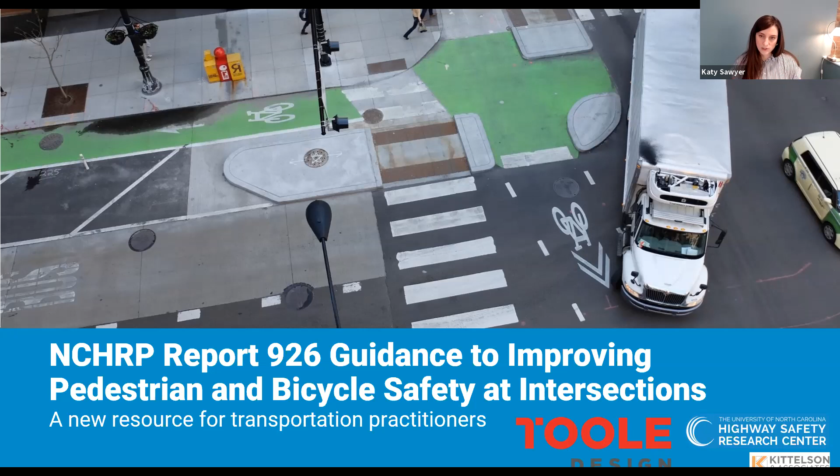This particular guide was led by University of North Carolina's Highway Safety Research Center with additional research support by Toole Design and Kittelson and Associates. So I'm going to walk you through this guide. I think it's a really great guide for practitioners. A lot of us have had questions over the years of suitable countermeasures and how effective they are with things like Vision Zero and Toward Zero and safe system approaches that are becoming very popular. I think all practitioners could use some more help on determining what are the most effective countermeasures for increasing pedestrian and bicycle safety at intersections.

So what that translates to today is that about 18% of fatalities on our roads are happening to bikes and pedestrians, even though they only make up about 4% of the total trips on our system. And so that's a huge injustice when you think about our most vulnerable users and also the amount of funding that we're putting towards transportation safety projects. Even though they're making up about 18% of those fatalities, typically only 4 to 5% of federal funding is going specifically to bike and pedestrian safety.

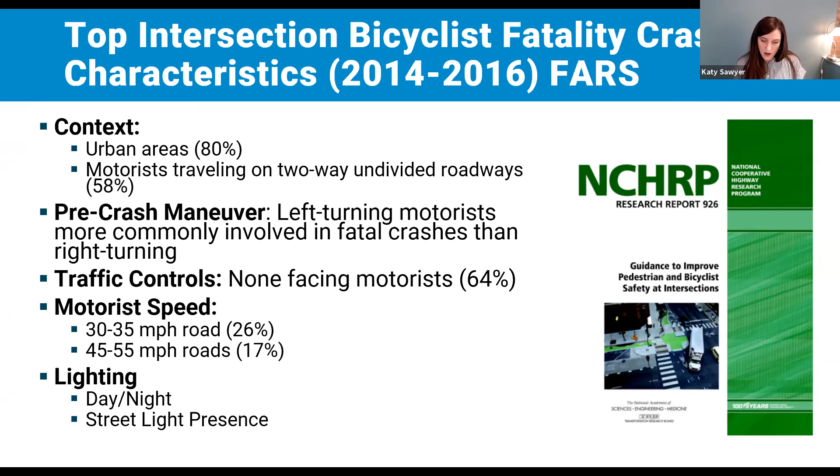So some of the other references and guidelines that this report references that exist today: FHWA PedSafe and BikeSafe web resources. There is the AASHTO bike guidelines. ITE has some context-sensitive design manual around multimodal systems. And then the FHWA STEPS program recently came out with pedestrian safety at uncontrolled crossing locations. So these are all really great resources that this guide references. However, there's some holes in some of these.

I think a lot of practitioners know a lot of the countermeasures that are out there because they're kind of thrown at us. So we know of a ton of different things we can do, but we're not really told the process for selecting the proper countermeasure and the research behind it. So using this guide, the guide is set up so each chapter is a different step in the selection process. So it creates a framework for improving bike and ped safety at intersections.

So the first step is framing the decision-making process. As this FHWA quote states, this is from some educational material, bicyclists and pedestrians are intended users of the roadway. 10 years ago, you might have been able to say, well, this street wasn't really meant for pedestrians, so that pedestrian shouldn't have been there. You might have been able to get away with that in the past, but things are changing, and liability is changing. So by not addressing these sorts of crashes, local jurisdictions are really putting themselves at a huge amount of risk for liability.

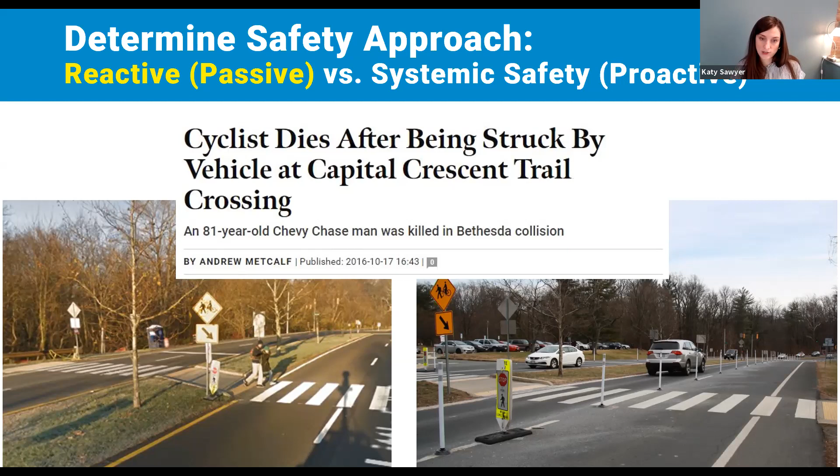So chapter 2, identify and collect data for analysis. As an engineer, my first question is always, what's the ADT on a street? What's the posted speed limit? And what's the actual speed? So that's all motorist data. It does help me to make some contextual decisions about what's happening on the street.

It's also the most readily available data, but that's not enough data to really help inform decisions for mitigating safety issues. So this guide really dives into other types of data that can be useful. For example, crash data, obviously. It talks a lot about exposure. So the ADT of motor vehicles helps you decide on the amount of exposure that bikes and peds are experiencing. Things like turn volumes also help with that.

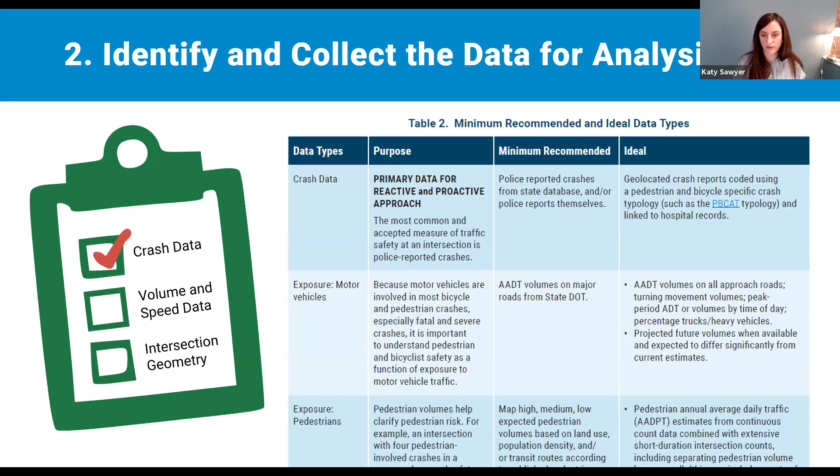So the infrastructure geometric design is very important. So it tells you how to look for certain issues there. Signal operations, intersection control, of course, speed, and then those conflicts that are happening. So this guide really dives deep into collecting data. Data is so important. We talk about defensible data-driven decisions, but I don't know if we talk enough about the quality of data, tying data to the purpose of our safety project, and then afterwards evaluating that to make sure that we've accomplished our goals.

So one thing that this guide also does that I really like is that it dives into the top pedestrian and bike fatality types, and it walks you through what is happening for each of those types. So for example, bicyclists riding through a signalized intersection on a red light, that's about 15% of fatalities. That's really high. I think a lot of people may say, well, of course, bicyclists aren't following the law. They never do. They're just running through the intersection.

But as an avid cyclist, and knowing human nature, you don't have to be a cyclist to know this, but people on bikes aren't just blindly blowing through intersections with their eyes closed, hoping that traffic isn't coming. There's more happening here. I know that cycle lengths are timed for motor vehicles, typically, and bicyclists and pedestrians don't like to wait more than 30 or 60 seconds before they try to find an opening in traffic to go. So retiming those signals is important.

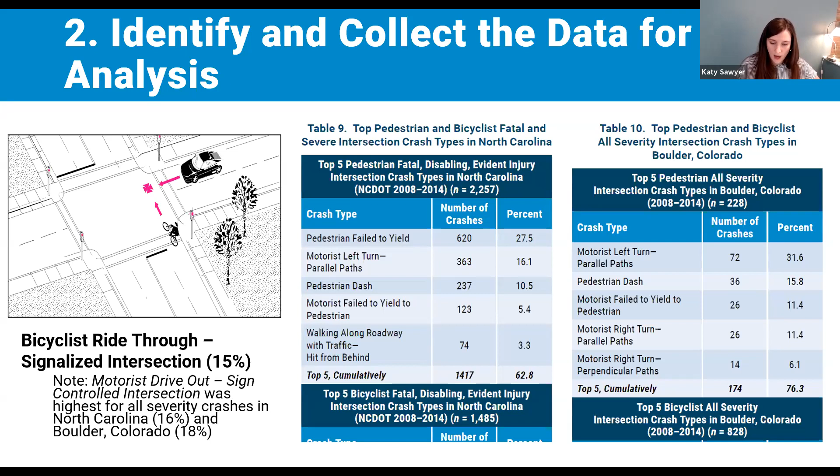Also looking back at that crash data, that is really not as useful as it should be. You may know that a crash happened at an intersection, but you don't know if there weren't bike facilities there. You don't know where that bike was. If there was a bike lane, they might have been in the bike lane. If there's no bike lane, they could have been traveling on the sidewalk. They could have been trying to use the crosswalk to cross with a pedestrian signal. There's a lot of things that could be going on. So this guide kind of helps frame some of those.

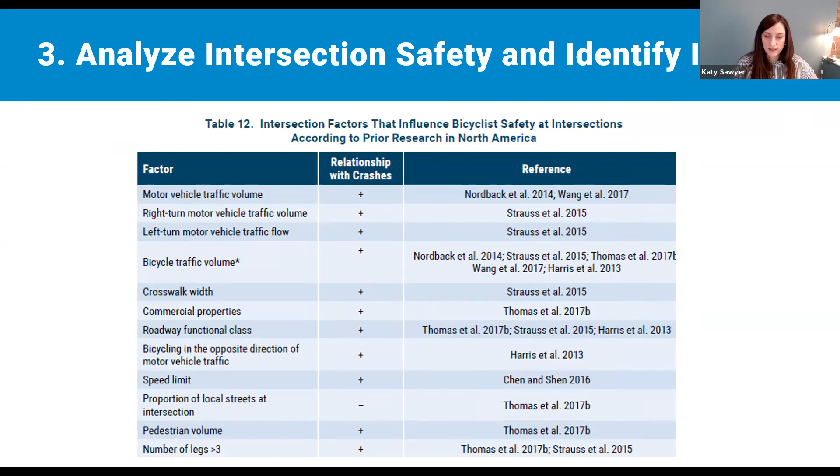And then chapter 3, analyze intersection safety and identify issues. So there is no systemic guide yet for bike and pedestrian safety, kind of thinking of that proactive approach, but past research can still be used to identify risk factors that have been found to impact safety. So the guide has some information on that, which can be helpful, kind of positive and negative correlation to safety. And so this is also kind of looking at that proactive approach.

So if a car opens their door and they get doored, they're flying into a bus, right? If a driver is distracted for a split second and starts to veer into the bike lane, they're getting hit. So really thinking proactively about our streets and how we can make them more safe before a tragedy occurs is really important.

So one way that this guide helps to address some of those issues is that it starts to think about contextual countermeasures, and it incorporates that factor of safety that allows for all roadway users to make mistakes. We're all human, we're never perfect. So that context for this guide is done by creating 3 different tiers of mitigation. The first tier is something that supports motorist yielding. Number 2 requires intervention to induce the motorist yielding. And tier 3 completely separates the modes or requires motorists to stop.

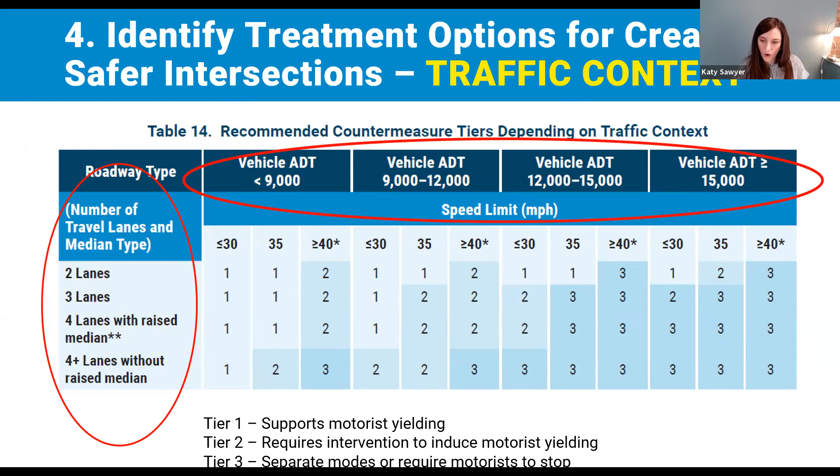And so when you look at this chart, you've got the ADT up top, and then you've got the number of travel lanes. So when you look at 4 lanes with raised median and ADT greater than 15,000, this chart is saying that you're at a level 3. You need to separate your modes or require motorists to stop. So for the intersection that we were looking at previously, this guide is telling us that it's a tier 3. And if you want a high level of effectiveness for reducing the likelihood of crashes at this intersection, you're going to have to get pretty severe: grade separated crossing. So build a bridge or dig a tunnel, channelizing fence or barrier, just completely preventing pedestrians from using the space.

Your first question of any project should be, do we want bikes and peds to use these facilities? And sometimes maybe that answer is going to have to be no, and you have to find some other way to accommodate them. Maybe it's directing them to a signalized intersection that is safer. But then maybe you're not ready for any of these. You just really don't think that those are feasible. The guide also gives some more moderate mitigation strategies. So signalization, a beacon that may suggest to motorists, hey, there's a pedestrian crossing coming up, please yield, and things like that. So your likelihood of success is going to be lower with the moderate buckets, but you may be more likely to implement something. So this guide takes that into consideration.

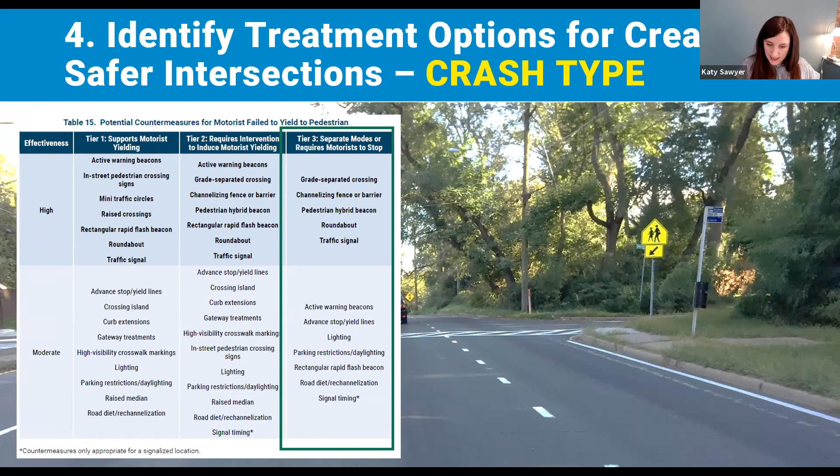And then, identifying treatment options for creating safer intersections. This table is really helpful because depending on the type of crash that you're seeing, there's different things in here, such as determining the amount of public process that's required. Very helpful to know from the onset. And you can kind of see your level of, look, I really want something that is really high, this is a really big issue. So this table can help you select the proper strategy. So a bike signal in a situation where it's tier 3, with bikes that ride through the signalized intersection, you're going to be able to mitigate that issue.

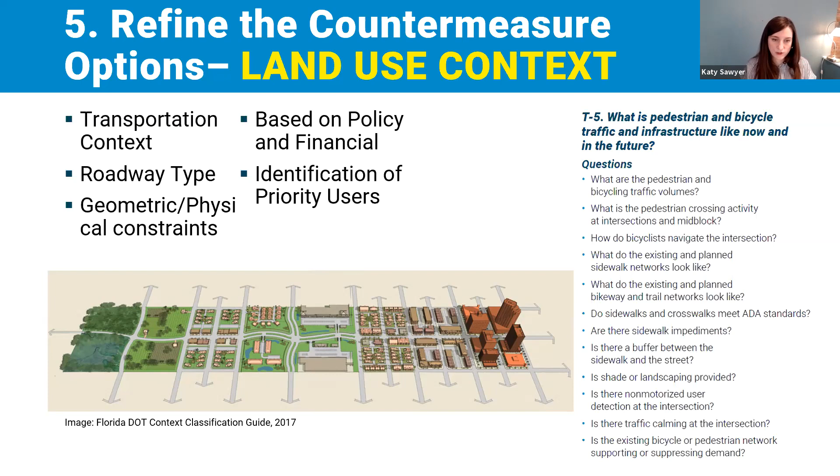And then also the guide jumps into land use context, which is very important. So we were talking about fences. In a downtown urban environment, you're not going to get away with putting up a fence and a no pedestrian crossing sign. But maybe further out in a suburban area where the land use patterns are much different, you might be able to get away with that. You might need to direct people to the safest place. So this guide also takes that into consideration, which is kind of unusual. A lot of guides are just starting to think more about land use and sort of connecting the planning and engineering pieces.

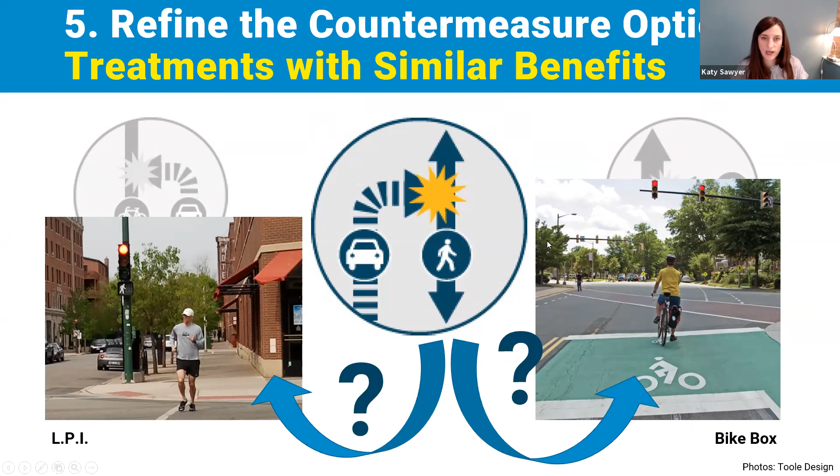Chapter 5, where you're refining your countermeasure options and trying to select, you've got multiple options at this point, so which one's going to be the best for you. This guide goes into how different treatments overlap or how they may be solving the same problem in what they do. So when you have an intersection where you really want to get bikes and peds out in front of motor vehicles because you're having some mixing issues, you may be able to select an LPI, leading pedestrian interval, and maybe you direct bicyclists to use that. Or maybe you just want bikes in front of cars and a bike box is a good mitigation strategy. So this really gets into that granular detail of the different types of mitigation strategies.

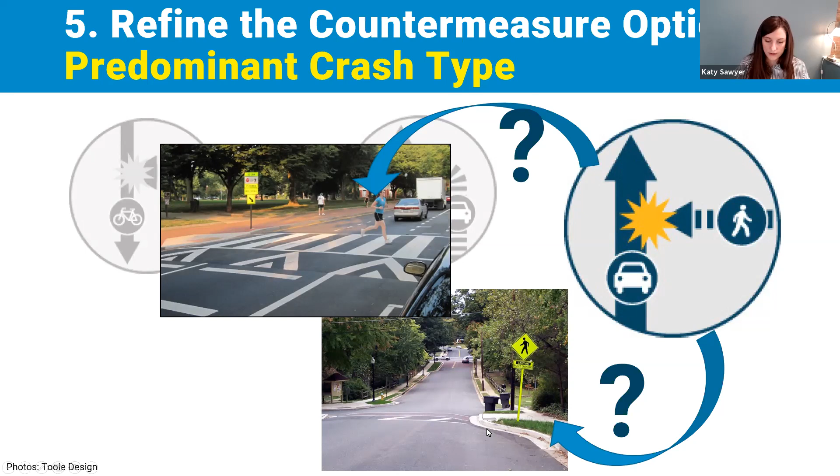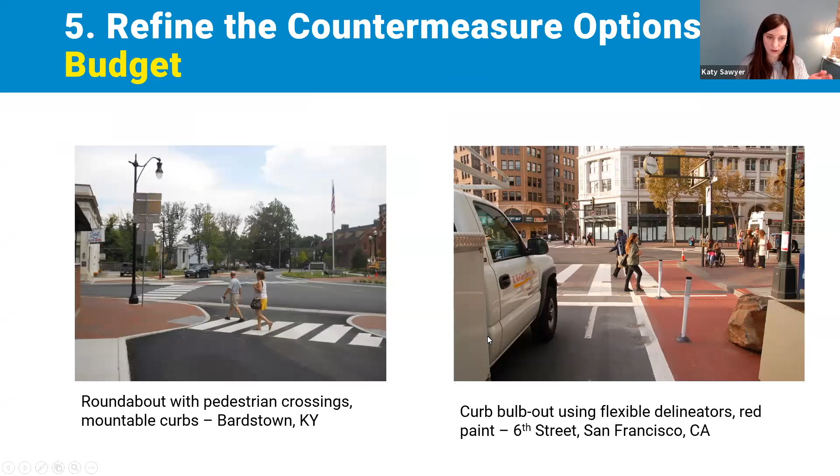So that may be a first step that you want to last for 4 or 5 years until you find your funding to do some bigger overhauls, which may look like what's on the left here. And then at the end, there's also a countermeasure glossary. So it talks about each of those countermeasures, also giving a crash modification factor rating, so you're really seeing how effective these are.

One thing that I found really interesting is curb extensions. There's really not much research indicating that curb extensions are really effective from a safety perspective. So when you're looking at a crossing island, one of those pedestrian islands in the center of a street, or a curb extension, I personally would choose a pedestrian crossing island every time.

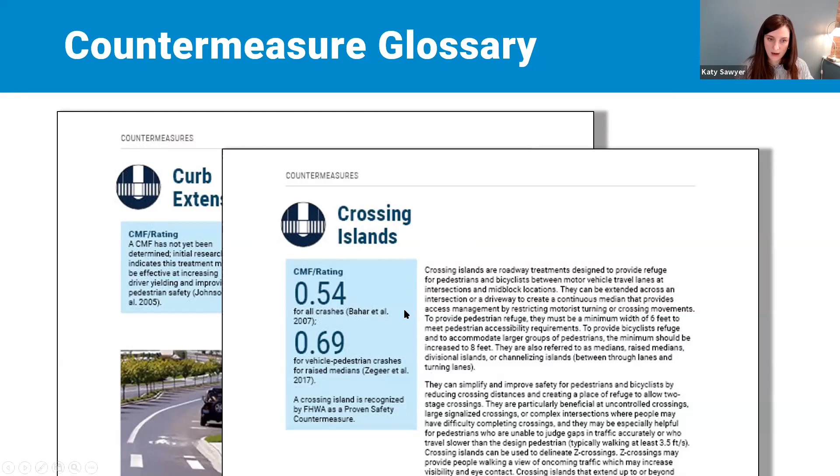But agencies really like curb extensions because they're easy and they might reduce the amount of parking that needs removed. So if you're taking the easy way, that may be where you end up. But this guide can help you as a practitioner say, no, we should do something more than just curb extensions. That's not really getting us where we need to be.

That's something that I did not talk about, but qualitative data collection is very important for bike and pedestrian safety. As engineers, we want quantitative data, but really it's effective to get out there and figure out what the near misses are, how users of the roadway feel when they use it, since we are lacking a lot of that quantitative data.

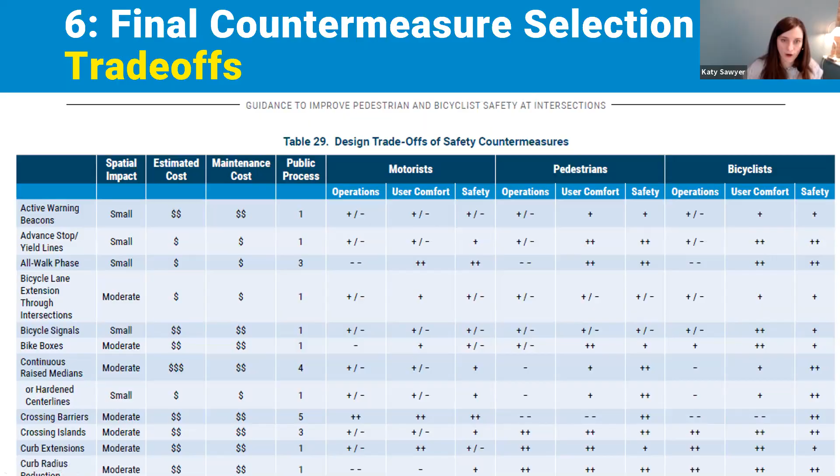And then it just talks about the trade-offs of each one, whether pedestrians will see a decrease in operations or motorists will, that sort of thing. So this is a really good one-stop shop for all of that information. So yeah, that's the summary of the guide.

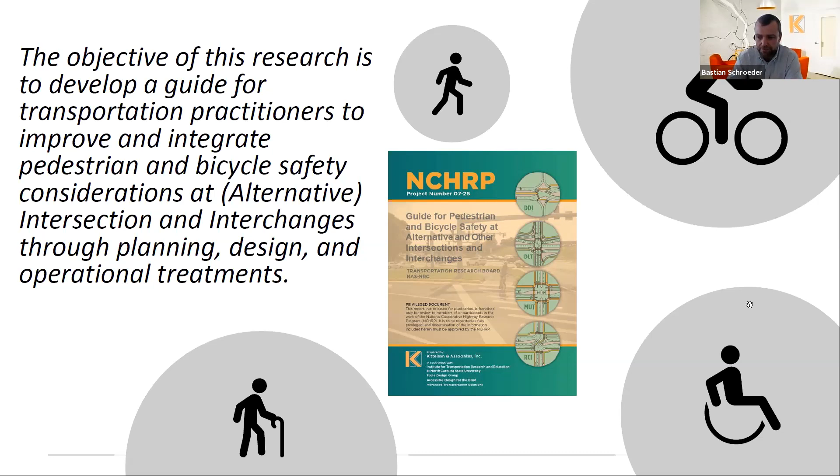But very early on in the project we recognized that it is not very helpful to have a method that can just look at the alternative designs if we can't also compare them to a conventional design. And so that's really what this guide is all about. So while it has a lot of information about the alternative concepts, the method that I'll talk about is much broader than that, to where it can help in the planning and design stages of really any intersection.

The key with this approach, and really any intersection design, is that it's iterative. Here's a chart that we borrowed from NCHRP Report 785, the performance-based design process, where you should go into a design with a certain set of intended outcomes, which presumably includes your traditional design characteristics: sight distance, fastest path for a roundabout, design vehicles, turn radii. But what we're advocating for is bringing in the pedestrian and bicycle elements really early on.

You come up with your initial design and then you iterate. And in order to allow for that iteration, you really need performance thresholds or some sort of a metric that you can use to evaluate the effectiveness of that design for pedestrians and bicyclists. And that really is what this report is all about.

In the project, we talked a lot about ICE policies, so intersection control evaluations that many of you may be familiar with. PennDOT has an ICE policy, many other states have as well. And so really what we're looking to do with this is integrating the considerations for pedestrians and cyclists very, very early on in the design stage.

We looked at intersections throughout our projects where, for example, we came to the conclusion that a separate bicycle facility is probably the best thing to do. It's the safest thing. And then we're told, well, we don't have the right-of-way for it. And that's the kind of challenge that you're running into if you're going with an accommodation approach, right? So looking at pedestrians and cyclists late in the stage, you have your curb line set, you have right-of-way set, you have drainage all figured out, and then all of a sudden, oh, how do we get pedestrians across the street? How can we have cyclists travel through this intersection?

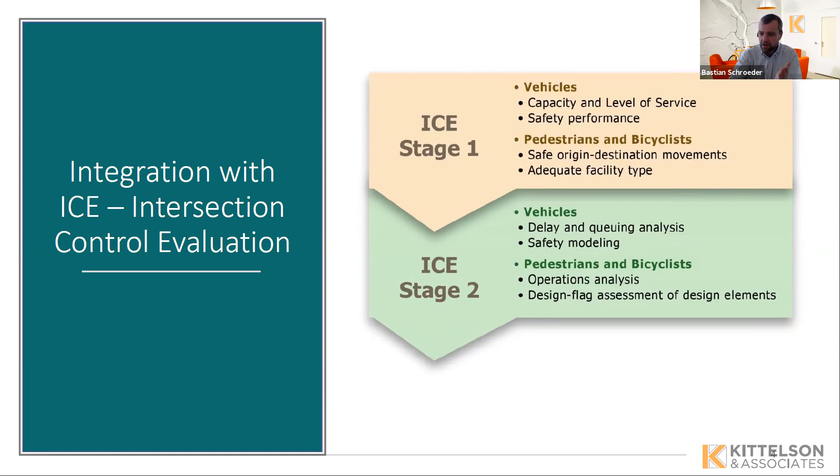So really the idea is, let's integrate the multimodal users into the design process really early on, even at the alternative selection stage, to then have more flexibility, because early on in the project you still have flexibility in the design decisions. Later at a 75% design stage, you really don't have many choices anymore.

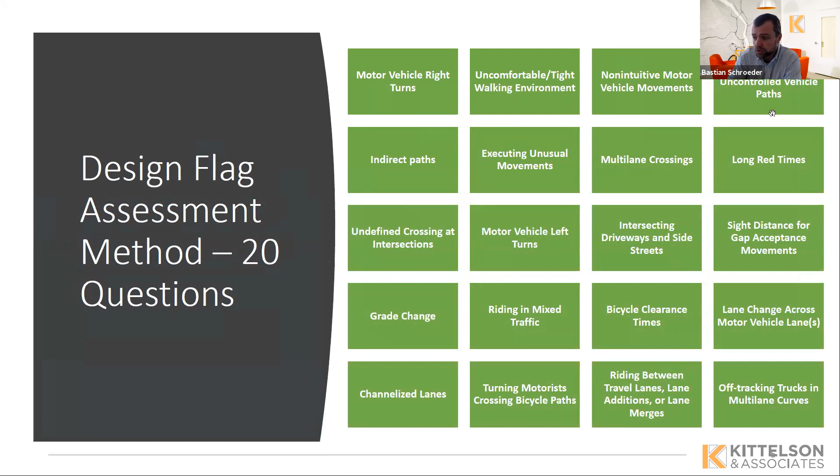So at the heart of this project is what we call the design flag method. It's really 20 safety considerations for pedestrians and cyclists that more often than not are associated with injury and fatal crashes. And so really what this method does is evaluate all 20 of these, and I'll introduce you to a few of these in this presentation. The flags are divided into what we call yellow flags and red flags.

So there's something for the soccer fans in here.

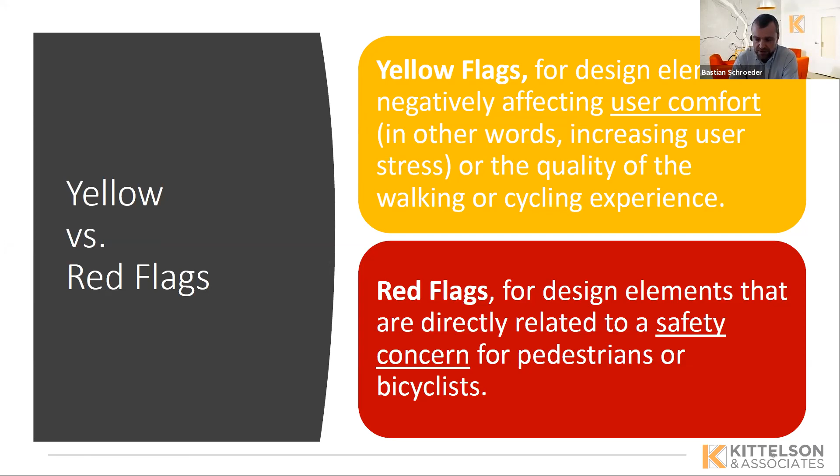Yellow flags are the ones that are impacting user comfort. So level of stress, the quality of the experience for walking and cycling, but maybe not being directly tied to a safety concern. That's where the red flags come in. Those are the ones that are directly tied to safety considerations. Both are undesirable, but both exist at intersections. And so what this method does is it flags these and highlights where they are.

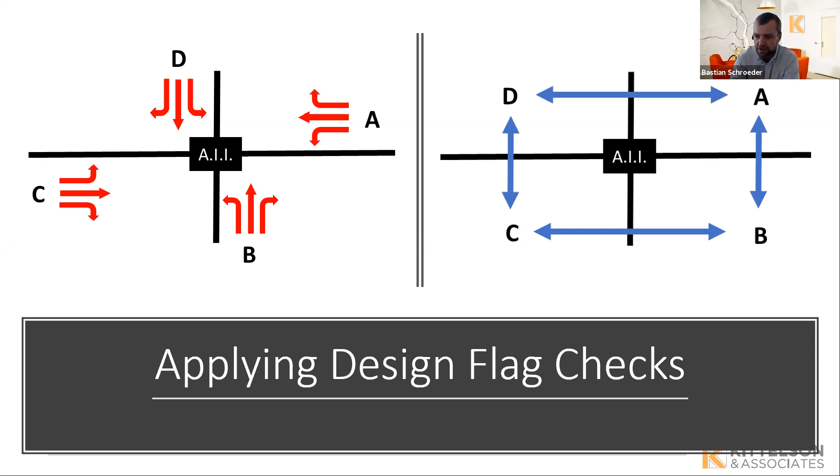The method is applied on the left for cyclists, really assuming cyclists operate as vehicles, so on the roadway: the 4 through movements, 4 right turns, 4 left turns for standard 4-legged intersections. And for pedestrians, we're looking at the crossings between the 4 quadrants. Obviously, this is modified for a 3-legged or a 5-legged intersection. And cyclists who use the sidewalk environment, maybe children, would be evaluated as pedestrians.

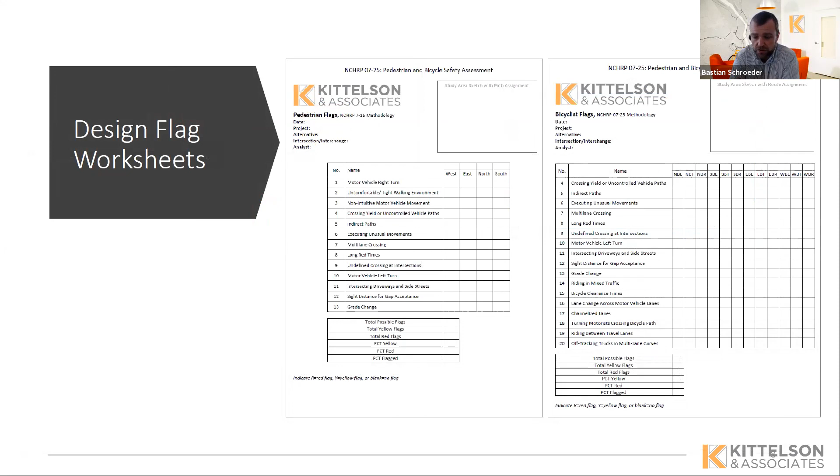The research provides a checklist, so really a scoring sheet where the idea is each of these cells is evaluated, and each of the flags further has thresholds. So there's a table provided that you can use to then look up, is this a yellow flag or is this a red flag?

This is our goal. Our goal is to be able to compare, let's say, 4 alternatives, so 4 different intersections, and in addition to all the assessments for motor vehicle safety and level of service and delay and queuing and all the things that we typically look at, let's give it a pedestrian assessment and a bicyclist assessment, where we can see in this case that alternative C is really the best from a multimodal safety perspective.

Does it eliminate all red flags? No, it doesn't. But is it better than, for example, alternative D, which has a significant portion of safety concerns for pedestrians? Yes, it is. And so the idea is that once we have this initial assessment, we can now iterate and see if we can mitigate some of the design flags.

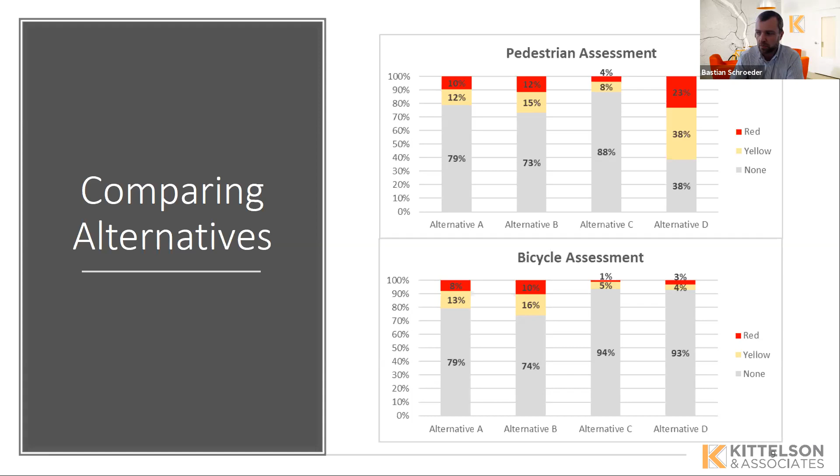And the report talks about many different strategies, from countermeasures, treatments, RRFBs, pedestrian hybrid beacons, raised crosswalks, maybe even grade separation. But by putting this on the table really early on, it might be that from a vehicle level of service perspective, alternatives C and D are more or less equal. Then this can give you the argument, well, let's go with C because it really works much, much better for pedestrians. So let me give you a few examples of what these design flags look like.

Obviously I can't go through all 20, but one of the ones we look at is motor vehicle right turns. And so really a right turning vehicle typically has 2 kinds of conflict. It has the near side crosswalk, so at the upstream end of the right turn, there's a conflict that typically occurs with a right turn on red movement. So an easy mitigation is to not allow right turn on red. And then the downstream crosswalk has a conflict that happens during a right turn on green movement, when typically those pedestrians would also have the walk indication.

The severity of that conflict is a function of the vehicle speed and the vehicle turn volume. If this right turn has very slow design speeds, then it is generally much safer, and it might not be a flag at all, as opposed to when it is a very large swooping right turn with really high volumes where vehicles really just are able to fly around the corner.

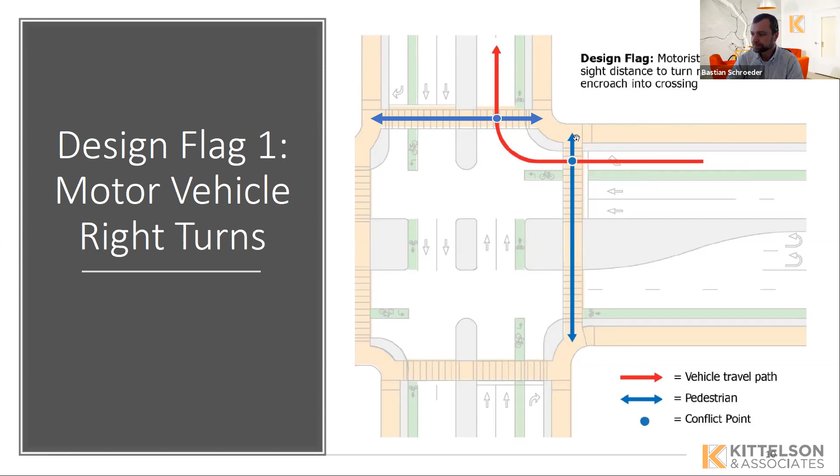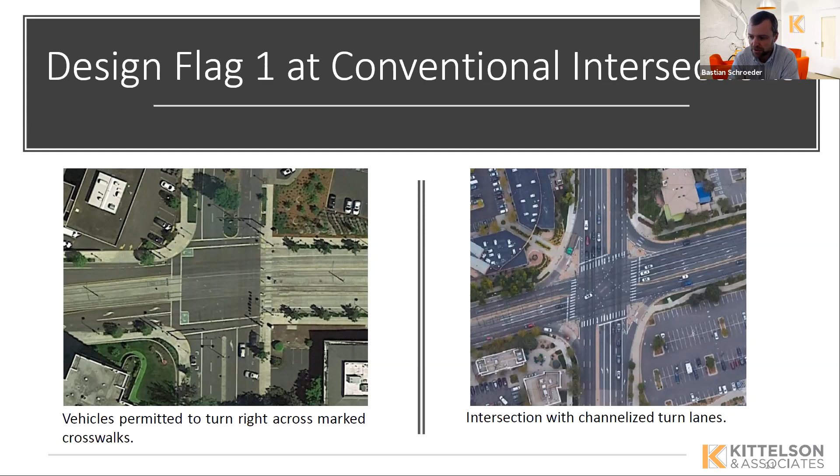Bottom right is an intersection in Boulder, Colorado with channelized right turn lanes, where 3 of the turn lanes actually were retrofitted with a raised crosswalk. So again, the channelized right in this case was actually introduced as a bicycle safety treatment to eliminate or help with some of the right hook crashes. And so then it introduced a pedestrian safety concern, which was then mitigated by putting in a raised crosswalk. The goal of our approach is to help quantify these things.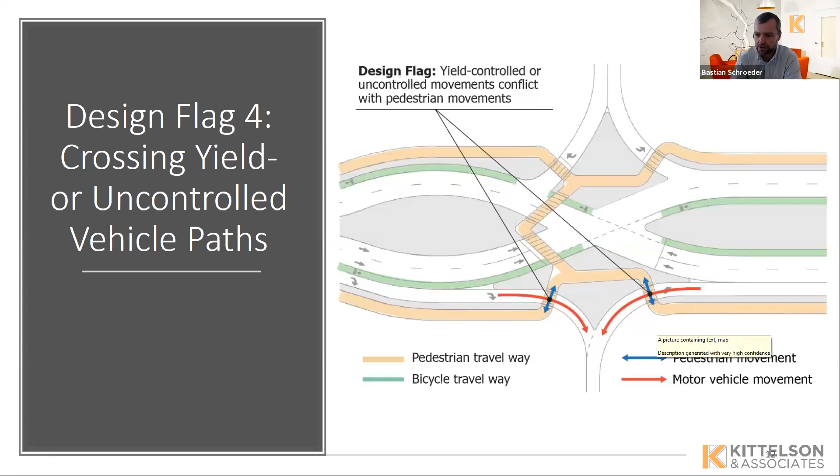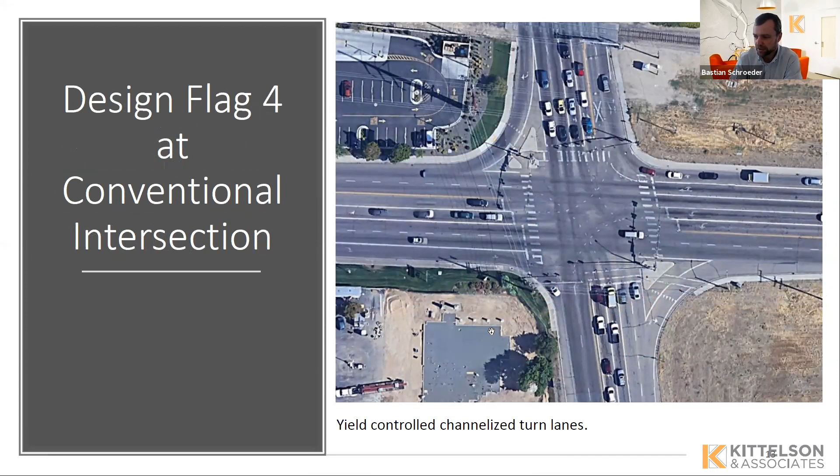But this also happens at conventional intersections. So here's another example of 2 channelized right turns, especially the ones with acceleration lanes, where those movements might happen at a really fast speed.

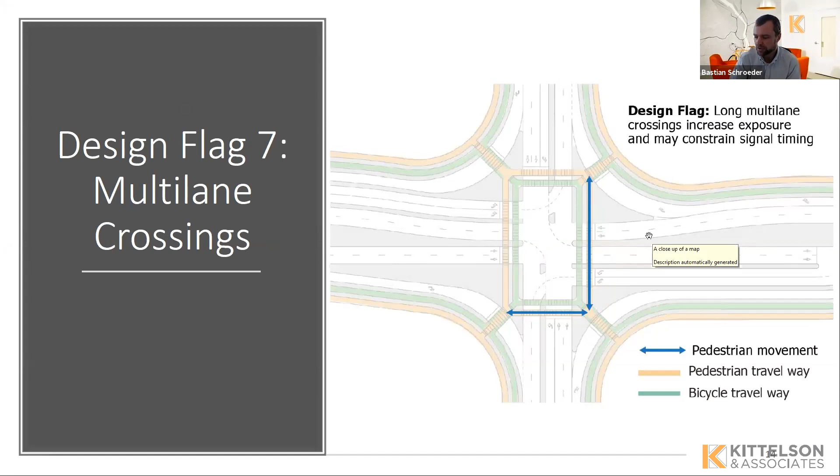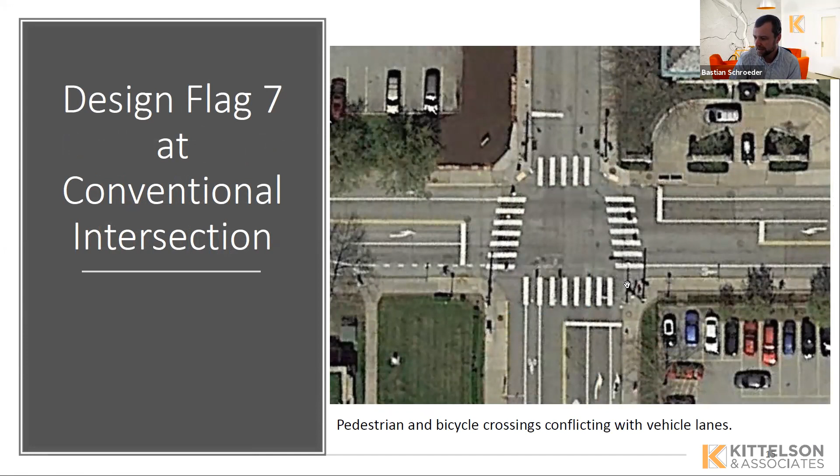Another flag is multi-lane crossing. So whenever pedestrians have to cross multiple lanes of traffic, there's more exposure. Katie had some of those examples in her presentation, and so that is something we see at alternative designs, and also at conventional intersections. Sometimes you see a really short crossing here, just 2 lanes, versus just on the opposite approach where you have a dual right turn, you have a bike lane. So all of that adds to pavement and exposes pedestrians in their crossing.

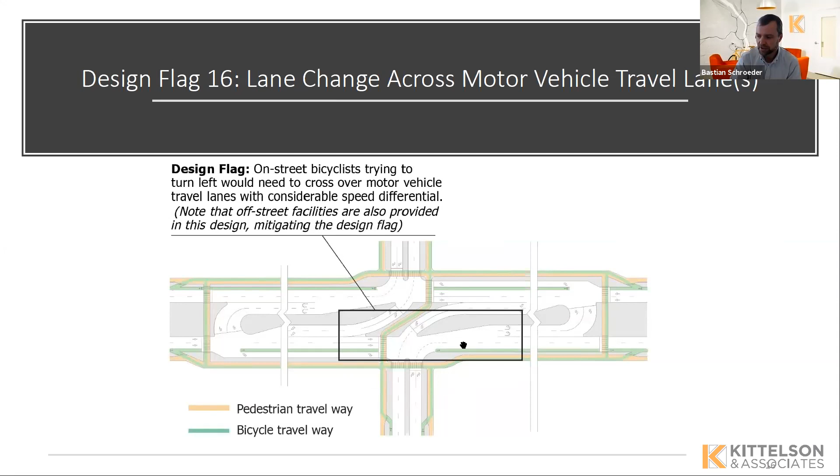And then here's an example of a cyclist flag that happens frequently at an R-CUT, as is shown here, where a cyclist trying to make that left turn in a traditional R-CUT configuration is expected to go through the intersection, weave across 2 lanes of vehicle traffic, and then go into this U-turn bay to travel back. So the thought of a cyclist changing lanes with traffic going at 45, 50 miles an hour becomes a very, very challenging environment. But this happens at conventional intersections too.

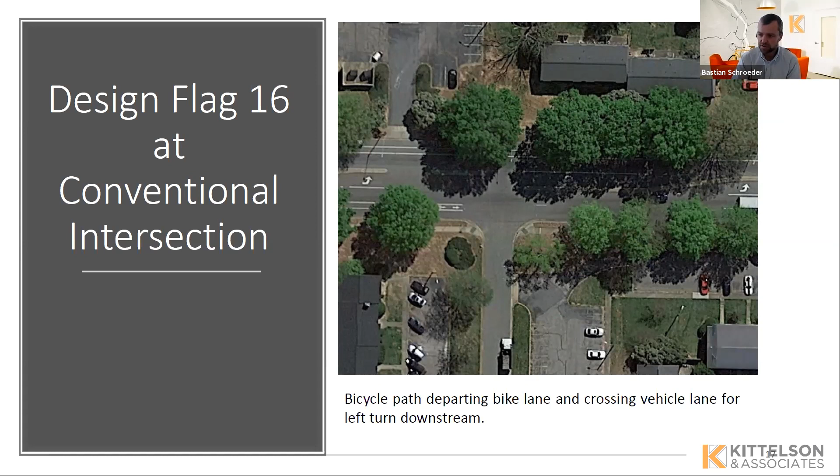So here's a bike lane that you can kind of see through the trees, downstream left turns. In this particular case, the cyclist has to make 1 lane change to get into the turn pocket. Are those 2 the same? No, they're not. And then this is what the method does: it flags the movement, but then it also rates the severity of the conflict based on the vehicle speed, the volume, and a few other considerations.

So I wanted to relate all this to a study intersection that is in Wilmington, Delaware, and it's a conventional intersection. This is the intersection of Faulkland Road and Centre Road, on the outskirts of the downtown area, for those of you who might be familiar with Wilmington. And if you look at the aerial, it looks like it has all the pedestrian bicycle features in it, right? It has channelized lanes, really high contrast crossings, sidewalks on all of the approaches. There's actually some bike lanes going through on the east-west approach.

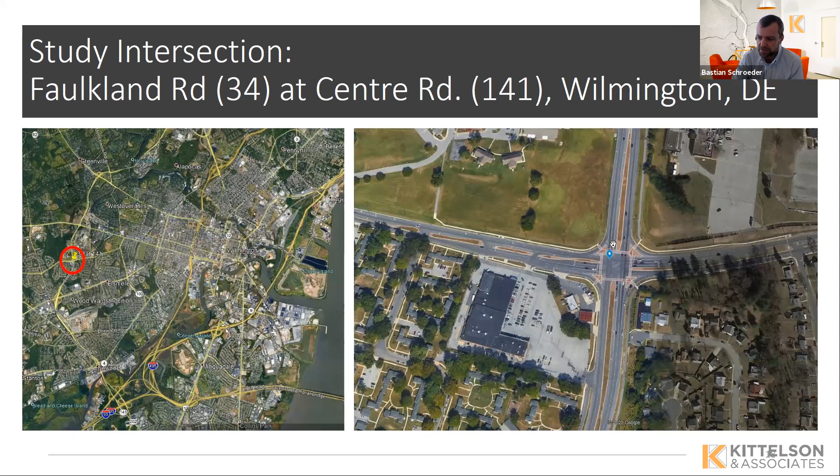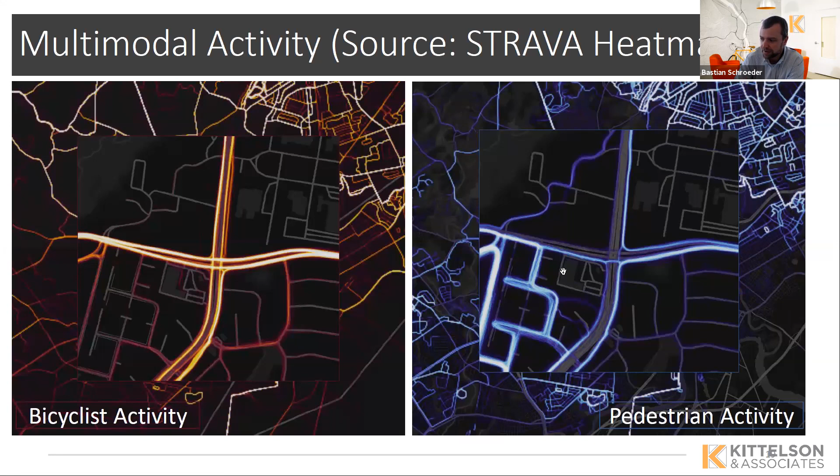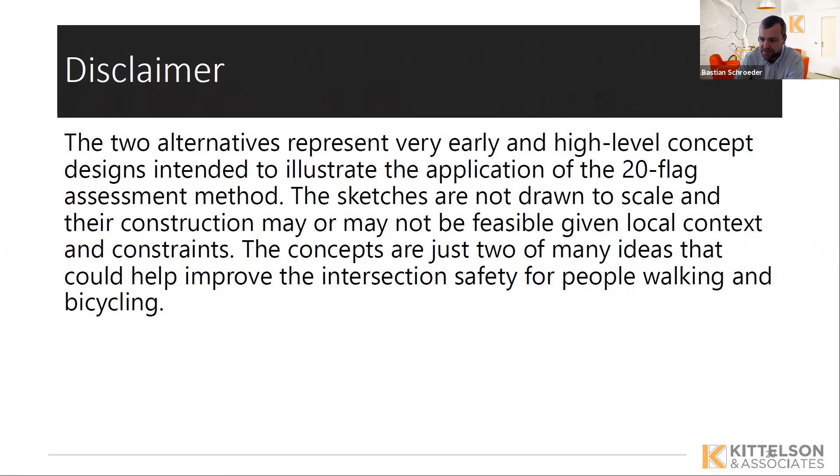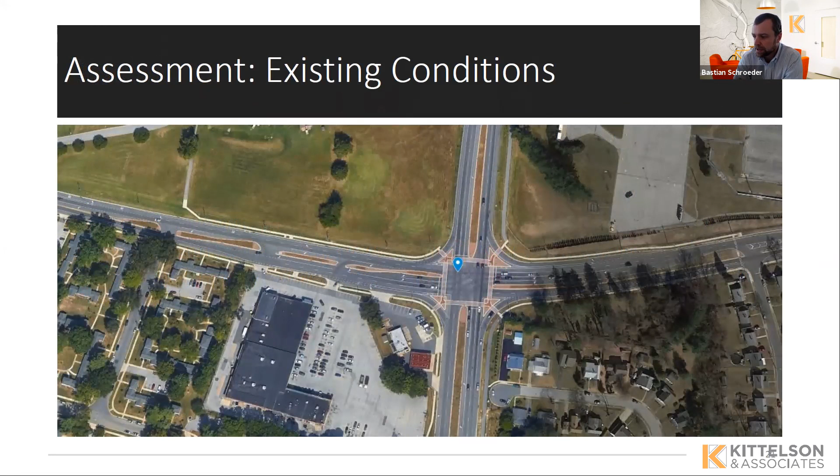And so I'll present 2 design alternatives, and I'll give the disclaimer that these are very much early concepts. These are hand drawn, not done in CAD, but I wanted to at least give you a sense of how this method is applied. So if we start with the existing conditions, this is where the animation would have otherwise come in, so it looks a little bit crowded now because everything comes in at once. So just a few things to highlight.

Over on the left, when doing the 20 flag assessment, these are the flags that were highlighted. The first one is a red flag, the motor vehicle right turns. In all of these cases, the vehicle right turns are quite fast. They're also heavy volumes, and so those are all concerns raised for pedestrians. Crossing the yield-controlled path, this is actually down here.

So when a cyclist moves through the intersection, they go through a vehicle movement that is only controlled by a yield sign, and so there's a concern that the vehicle flies around this corner and then has a cyclist that they need to yield to, but the vehicle may or may not be paying attention to them.

Multi-lane crossings. Pedestrians have the equivalent, if you start counting here, of 2 through lanes, 2 left turns, a median, and 2 opposing through lanes. So really a 7-lane crossing, exposed, without any kind of refuge. There's 4 driveways that pedestrians have to interact with. There's some sight distance concerns.

For this particular one, a pedestrian trying to cross, when they look over their left shoulder for a gap in traffic, there's actually a line of trees and some vertical elevation here that makes it really impossible to see the approaching vehicles, and vice versa for the drivers to see the pedestrians.

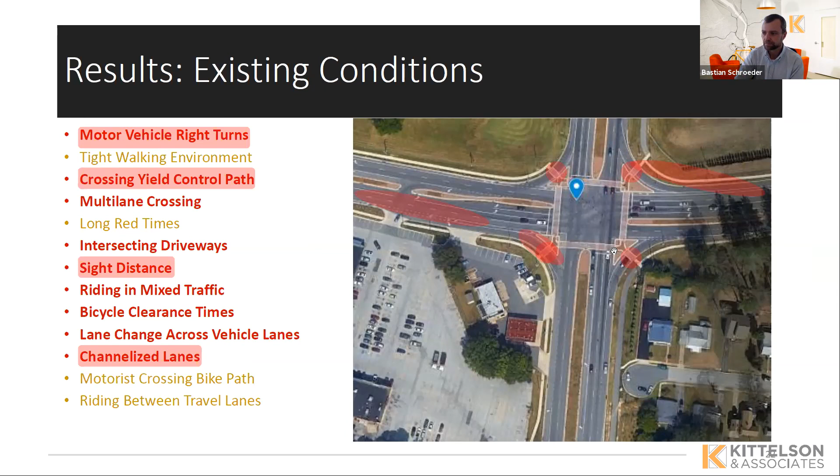So here's what that assessment looks like. So the first look at the intersection might suggest, well, we have bike lanes, we have sidewalks, we have marked crossings, we have high contrast pavements. But when we really run it through the assessment, for pedestrians, we have 31% of the movements experiencing a red flag and 23% of cycling movements experiencing a red flag. So really some significant concerns.

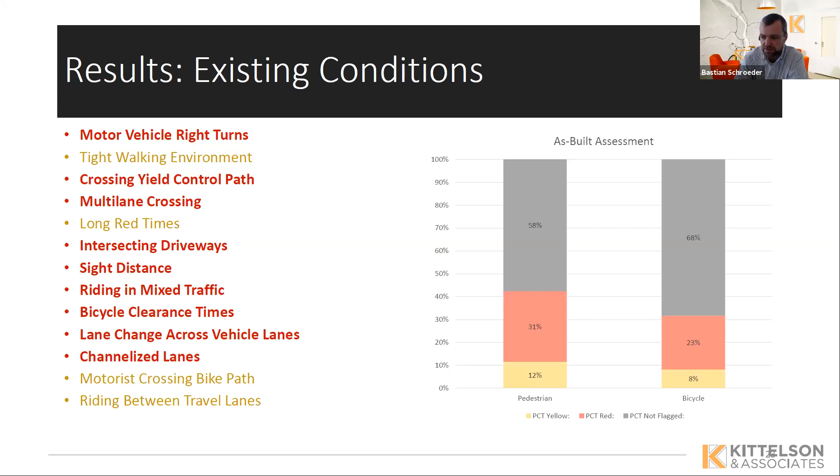So let's roll through a potential mitigation. Again, apologies for not having the animation in here, but I'll just kind of go through these. So our first look at the intersection was, what can we do with a low-cost treatment? And so there's 8 strategies here that all happen within the curbs. We're not changing curb, we're not changing drainage. We're really looking, what can we do?

The first is we widen the cut-through islands. They currently are at the minimum of 5 feet, which is required by ADA. The islands are plenty wide enough. Let's give pedestrians a more comfortable environment to wait. Maybe there's multiple pedestrians. Maybe it's a cyclist pulling a bicycle trailer behind them. So let's widen the island because we can.

The next is install raised crosswalks. So in all 4 of the channelized lanes, if this is here for capacity treatment, or if this is here for providing a turn radius for a design vehicle, let's slow the vehicles down. They don't need to go around this turn at 35 miles an hour. So the raised crosswalk will provide better crossing opportunities for pedestrians.

Third, striping the bike lane through the intersection, providing that positive guidance for cyclists as they're going through the intersection so that they know where they are, and that drivers also have the visual confirmation to expect cyclists. 4 is a really important one, adding a 2-stage left turn.

So instead of a cyclist weaving across traffic, have them go through the intersection, pull over to the right. So in advance of the stopped vehicles outside of the crosswalk, they can turn their bike 90 degrees, and then with the north-south green, they can then go through the intersection in a safe movement. You can further help those cyclists by giving them an LBI, a leading bicycle interval, to where they can actually get a head start of that stopped traffic.

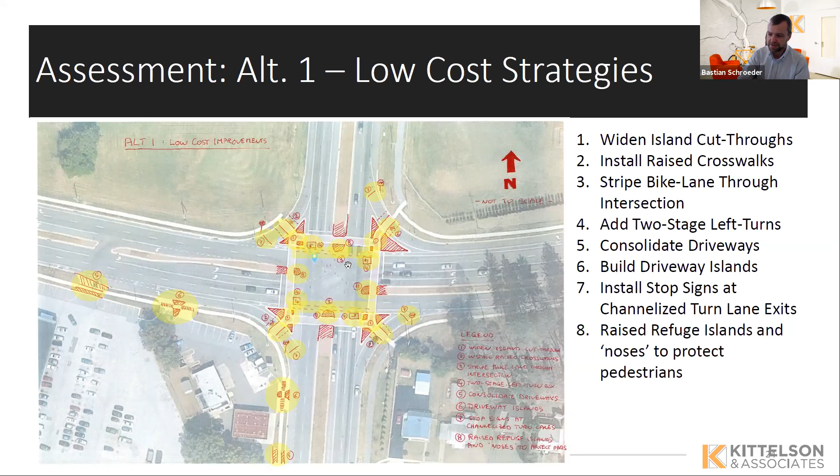And then finally, taking the refuge islands at the intersection and pulling those out forward to provide these kind of bullet noses, so some positive protection. It's still a long crossing, but you're breaking it up into a 2-stage maneuver, at least in the pedestrians' minds. It also helps whenever there are permissive left turns, for example, that they have to really go around the way that they're intended to, following the skip lines, as opposed to cutting through the pedestrian space.

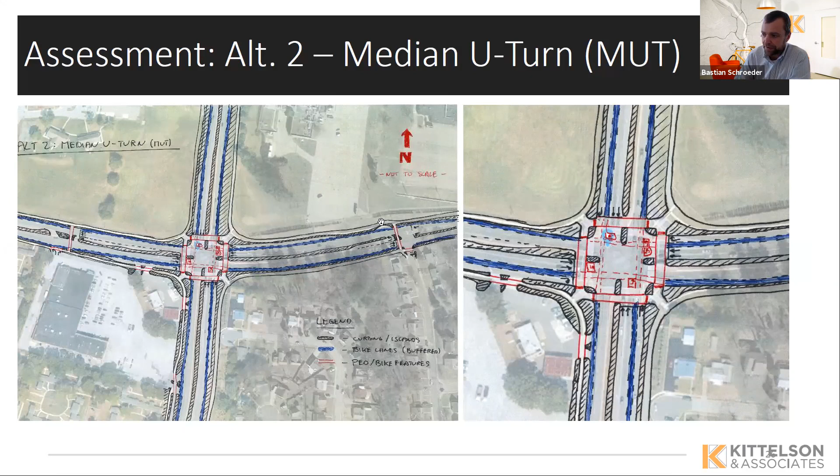And so this approach, again, similar, better performance for cyclists. So we're going to 4% red flags for cyclists. It does leave some concerns for the pedestrians, and those are shown here. Still some right turn concerns, some delay concerns.

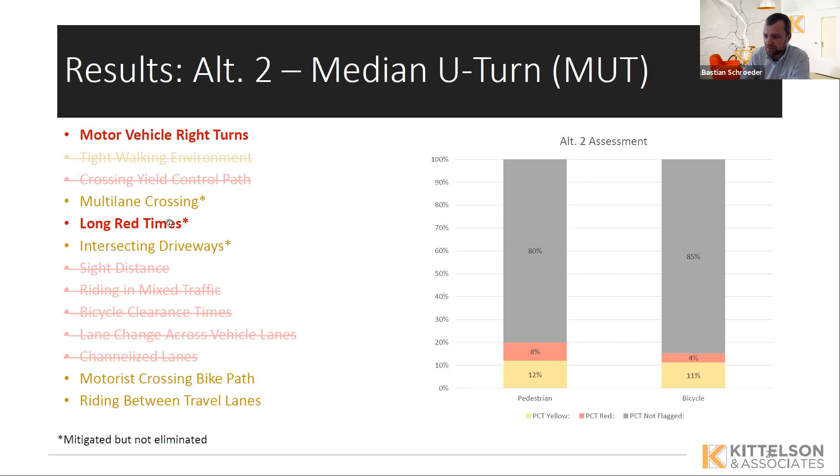So taking it all together, we went from a relatively small assessment or short duration, maybe about an hour or so. We were able to quantify the conditions of the as-builts, as well as 2 alternatives, and really seeing that the method is sensitive to these trade-offs. So alternative 1, which is the low-cost one, actually gives the best performance for pedestrians, leaving some concerns for cyclists. A wholesale redesign works a little bit better for cyclists.

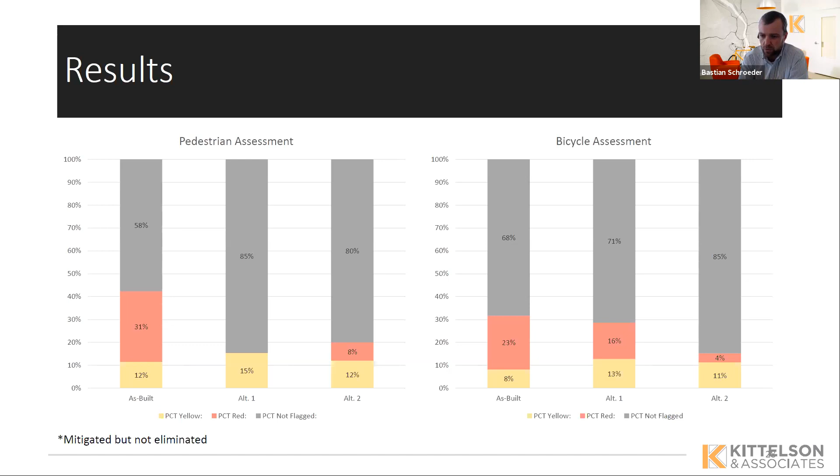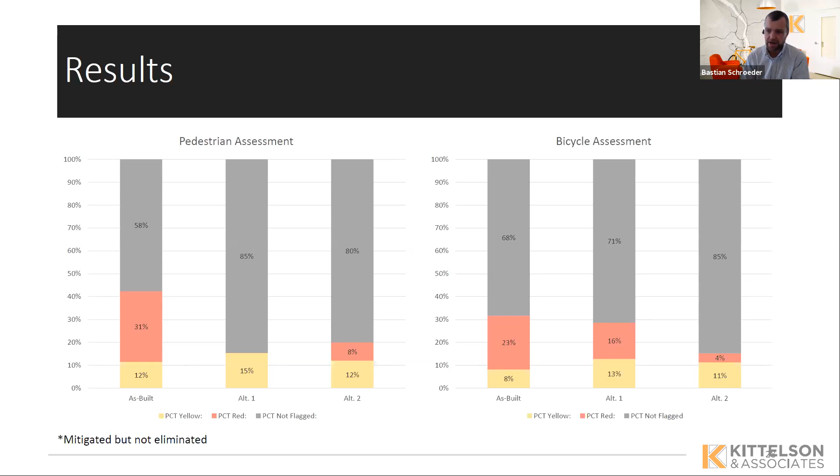Ultimately, as I mentioned in the beginning, you may not be able to eliminate all the red flags in an intersection, but just having the awareness and having it part of the consideration is ultimately what we're looking for. So a conscious decision that just marking a crossing, just providing a painted bike lane does not necessarily mean it's safe, right? So we want to really get to the why behind why we're doing a particular treatment, and that's what the method is intended to do. And then from here, it becomes an iteration.

Right? So now that we've done this initial set, we're seeing, and this is where as engineers and planners really our creativity can come into play. What else can we do? What are some other ideas? What have we seen other agencies do? You know, we saw Katie's report that talked about protected intersections. Maybe that is something we can do.

So really giving a basis for that decision making, where we feel very strongly that we are able to come up with intersections that meet the performance criteria for vehicles that are satisfactory from a fastest path, from a design vehicle perspective, the turn radii, that give us the proper level of service, that give us the safety performance. But let's integrate pedestrians and cyclists into that decision-making process from the beginning when it's still easy or easier for us to actually make changes to the design.

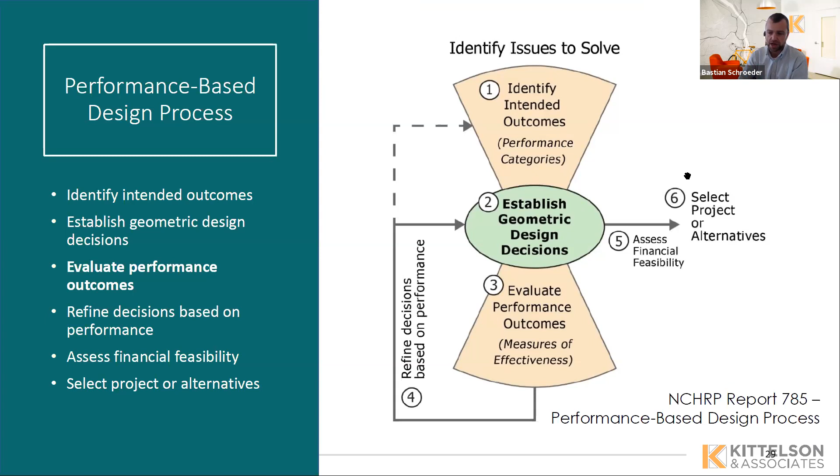Thanks, Bastian. I do see there's a couple questions in the question and answer box, so we'll try to jump through those. I see there's a couple that Katie already answered, but a couple of these other ones have come through here. We had a question: is the Strava heat map available to all practitioners, and is it only for certain areas, or is it separate software?

Yeah, great question. So I think the URL was in there. This is a free service, so Strava makes it available. There are pieces of this that you can purchase. I'm glad you asked the question because there's a really important caveat with Strava heat map. It is active users who use their phone. You can't see my phone because of the background. So it's active users who use their phone to track their physical activity.

So one of the big concerns that I would have of using a source like Strava is, is it really representative of the full populations of pedestrians and cyclists, right? So Katie mentioned the needs. She mentioned equity. That's a really important one, right? So there are certain demographics that are very unlikely to do an exercise trip using Strava, and that's the only part of the data that's captured.

So it's useful. I've never been to Wilmington, Delaware, and was asked to look at this intersection, so it was useful for me to wrap my head around what the usage might look like. But as we're doing an assessment of our conditions, it's really important to get a true sense of all the users out there. And really, for an intersection like this, I would have wanted to do local stakeholder engagement, talk to the local engineers and planners, talk to the residents to really understand what the usage characteristics are. So this was kind of a shortcut for me to understand what's happening.